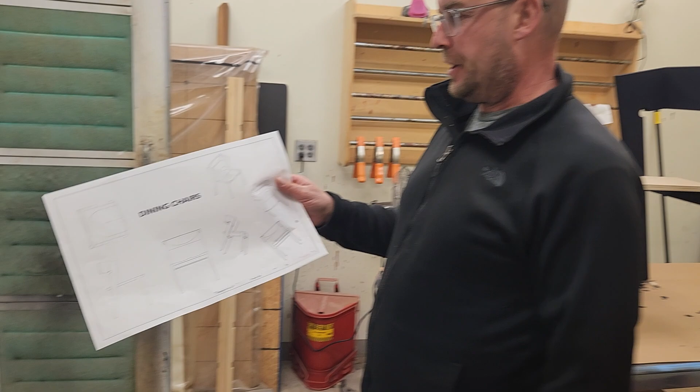Hi everyone, progress on the Dylan Design dining chairs. So these are chairs that go with the dining table that I built last year, which is not that one. No, not that one. A big round cherry one with a white oak base. So these are the chairs that match. Let me just show you the picture of how they're going to look.

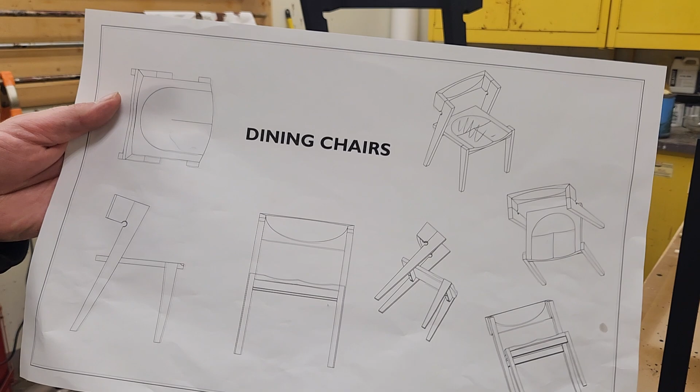So let's start with, if you checked in the past, I was going over the process involved with doing the legs and the stretchers and the backrest. As you can see, there's lots of foot angles, proper Dylan style design, and some tapers, some curves, some dishing out. So especially this backrest pretty much has got it all. So this was a fun one to do, quite challenging. So Dylan was keeping me on my toes with this one, which is all good.

So what I've been working on this morning is the process of ebonizing. So how we go about ebonizing is we start with a tannin. So this is a product that's derived from, I think Logan said, the making process of wine. So this tannin is a byproduct of the making process of that.

So we mix this, it's just a brown powder, and you could also use tea or the product from the brewing process of beer. So this is a brown powder that you mix with water, and then you apply it on the wood, let that dry, give it a bit of a sand, and then after that you would use this guy, which is steel wool that's soaked in distilled vinegar.

Right now I'm working on the upper door. This will be the upper door, which you have to put these little dental pieces in, then you have to fill the grooves. So there's a lot of work here. And then the bottom door, even more, it's got a 1/4 inch panel that I gotta cut all these square holes into. So I think I'm gonna cut these into strips like this so I can use a dado blade to cut these holes and then glue the assembly up.

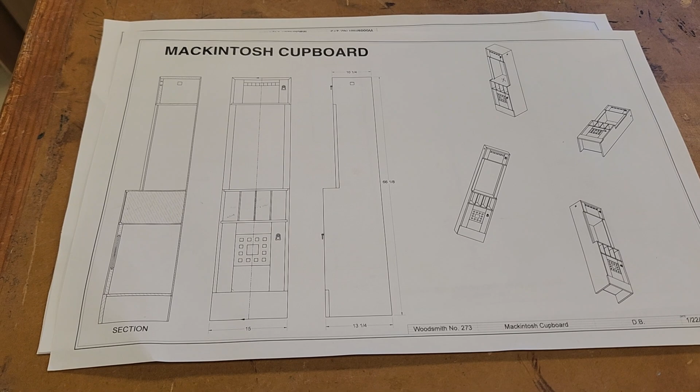So, and then just mortise and tenon joinery, and then I gotta fit all the hinges. And I'm not even sure what we're using for catches, but that's it.

Hello everyone. Well, I'm not sure I can compete with Marc's mess or Steve's project, but we'll go into the CNC room and talk a little bit about that.

And of course the mascot, the Woodsmith mascot.

Okay, so I want to give you a little update on the ShopNotes CNC machine project because the next installment is due out pretty soon here in ShopNotes Magazine, where we're going to be dealing with the gantry and this whole area with the router. One thing that I've been working on, just kind of tidy up a few details, has been dust collection. Because one thing these CNC machines can do is throw dust everywhere. And so before long, you gotta do something about the dust.

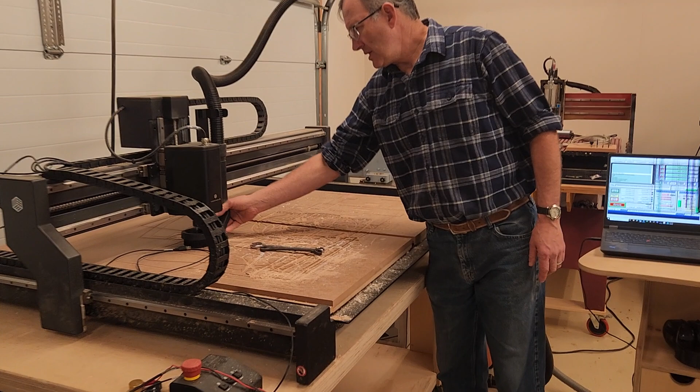So there are two types of dust boots that are commonly used with CNC machines. Let's take a look at one here. This is the Inventables machine we have. And this is a separate adjustable boot, and it's independent of the travel of the spindle. And that's kind of nice because you can always set your dust boot so it's just skimming on top of your project. Downside is there's a lot of area here.

And this is set up with a 1.5 inch hose for a standard vacuum cleaner. And it doesn't have quite the draw that you'd like. It does a good job, but not a great job because of all that area. So one way to avoid that and to keep things simpler, keep the mechanics easier, is to simply have a dust boot which attaches directly to your router mount. And it's going to go up and down with the router.

Couple disadvantages to that though. As the router travels up and down, it's going to be squashing the bristles. So you sort of have to begin your route with the bristles a little bit above, and you'll finish with them pressed down a little bit. This is a 2-inch bristle. There are other bristle lengths. This is a piece of 3-inch. And so I'm going to make another dust boot with a 3-inch for when I do thicker work, because that has a little more give to it.

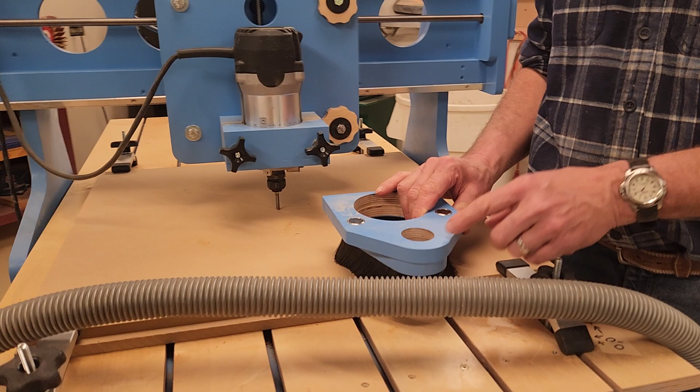One of the issues we have with this sort of setup is that when we come to the edge of a board, your vacuum cleaner goes here, we actually break the seal. And so I never get as good a pickup along the front edge of my work as I do towards the interior when the bristles are fully touching the workpiece. This is also using a 1.5 inch vacuum cleaner hose, so it's a little bit small. It does a good job.

I think what I would like to do is to work with the dust collection a little bit and see about using a dust collector. Now remember, a vacuum cleaner is a high velocity, low volume draw, but a dust collector is the opposite. It's high volume, but it's a slow removing speed of air. The hose is going to be larger, quite a bit larger, about 2.5 to 3 inches. So that problem of losing this suction on the edge becomes a little more of an issue.

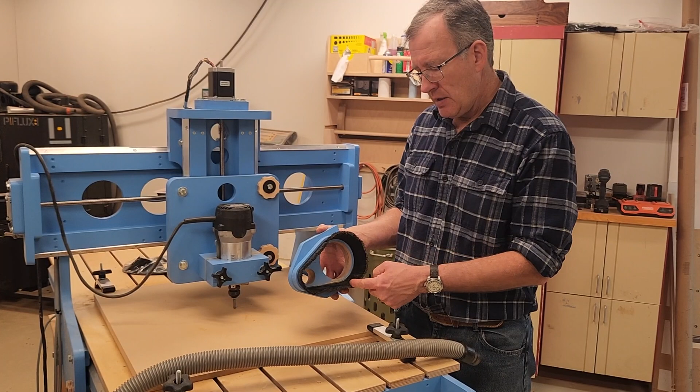What I'm going to do with that and with using a vacuum cleaner is I want to take a look at creating a captured channel from where the hose attaches to around the router. And if I can use a channel I can then have this bristle ring be a perfect circle around the router only, because the air will be sucking through a dedicated channel, and that will solve our problem with losing suction.

This is actually pretty easy to attach. I've got the machine set up right now with just a little test here, so let me go ahead and raise it. I've got it zeroed out at the moment.

One advantage of having a little bit of Z travel is that it's pretty easy for us to come underneath and attach the boot. The boot registers on this back edge against this board, and then I have rare earth magnets. Also, this cutout is just a wee bit larger than the router itself. And so if we strike something, between the magnets and the various points that it touches, it's really pretty secure. The hose just fits into that hole.

Now, one thing I've found over the years is that, I don't have it set up here, but a lot of machines may have an arm which supports the vacuum hose. What works just as well is to take a string or a little piece of rope and tie it off to the ceiling somewhere and just have it support the hose about yay high. That works really well. And that way you're not really committed to a big arm, which can be a bit of a problem. I find just moving a string works pretty well.

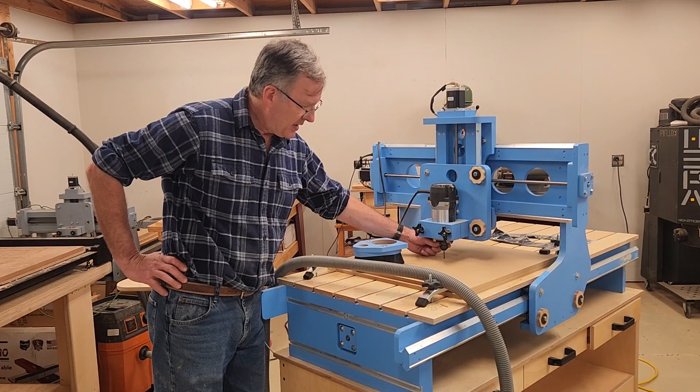I need to put an X and I need to drop the machine down to where the bit is just touching. And then using our controlling program, I can go ahead and strike in to zero out the X, Y, and Z axes. Any CNC machine, you're going to have a program in which you design your project in and one which you actually run the machine with. So I've created a little project file.

You're going to bear with my computer screen. I had a little speaker at home above my desk and it fell and struck the screen. So it's a little, not so good right now. My machine needs a trip to California to be repaired.

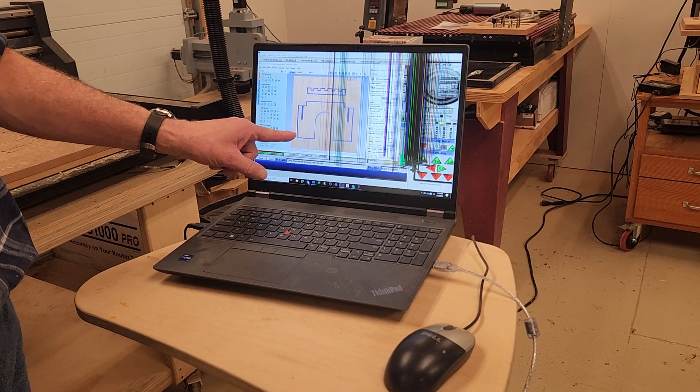As you can see here, this is a side. Here's our workpiece, about 2 feet. And this is just a side to a little cat castle project, which you'll see in Woodsmith, and a little piece of battlement. So I've set it up for a 1/2-inch thickness, and I've set it up for a 1/4-inch bit. There are a couple tabs which will keep the parts joined together as it cuts through, and that's what's currently in the machine. Bear with me with my computer here. Screen back out.

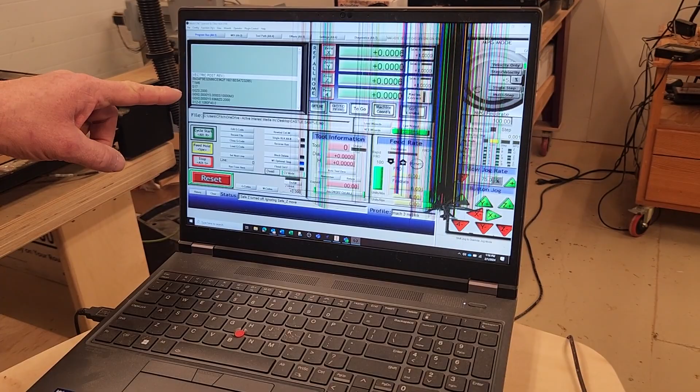All right. So this is actually the G code, which you see here. It starts the G code. There's quite a few thousands of lines of it, and that's telling our machine where to go. And then we have some basic controls. We have a start, a hold, a stop, and frankly, too much information than anyone really needs. Mach 3 is a great program, but it's a little bit busy. There are a few basic things.

I mentioned, there's a go to zero setting. When I press on the X, the Y, or the Z, that zeroes them out. Here's my value readouts for the X, Y, and Z axes. Right now I have a tab open here which allows me to move the machine. So as an example, I'm going to press on Z and raise the router.

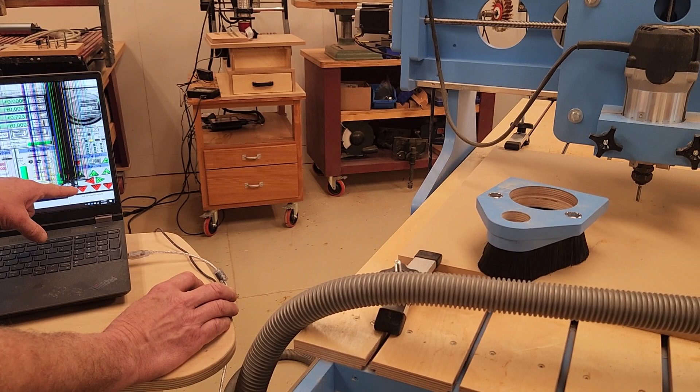If I want to press on X plus, it'll push the gantry away from us. And of course, if I want to go Y plus, I'll move it to our left. And if I just want to go back to 0, I'll press on that, go to 0, and put it back to our 0, 0, 0 point. So what I'm going to do now is I'll go ahead and raise the router.

Put our nice collection boot on. Put the vacuum in place. And just for the fun of it, I'll go ahead and start the vacuum. We'll start the router and we'll let it begin to run. And after about 5 seconds, Becky's going to have all the noise she can take and it's going to run out of here. But that'll be a good way for us to end our segment.